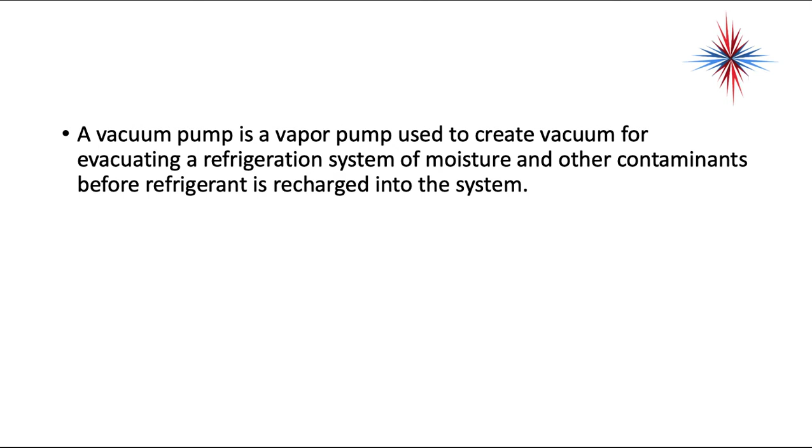This video is just a brief introduction and a little bit of a discussion about air conditioning vacuum pumps, or refrigeration vacuum pumps, because they're used on both air conditioning and refrigeration systems. So a vacuum pump is a vapor pump, not a liquid pump, and it's used to create a vacuum for evacuating a refrigeration system of moisture and other contaminants before refrigerant is recharged into the system.

A high vacuum pump will produce a vacuum higher than 28.92 inches of mercury vacuum. Most manufacturers are now recommending a vacuum of 500 microns prior to charging a system. The lower the micron count, the greater the vacuum. This can take several hours depending on system size. Creating such a low pressure condition is necessary to completely dehydrate the system. Do not rush vacuums, okay? Again, the lower the vacuum number in microns, the better off your vacuum is going to be.

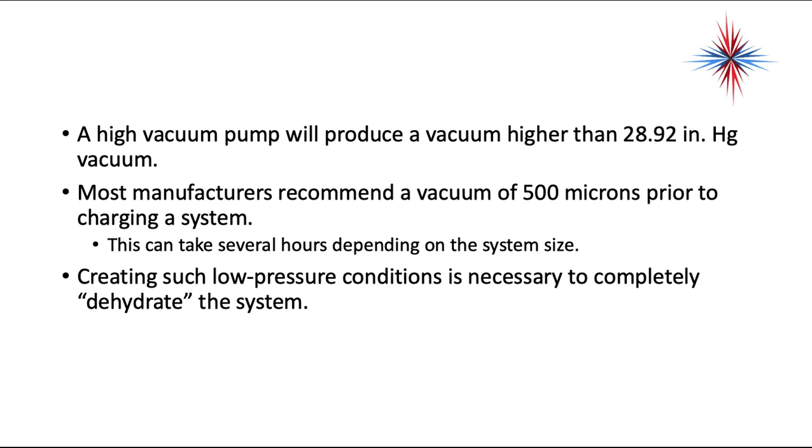It is necessary to remove all substances from the system because any foreign material can cause higher pressures than usual and possibly damage the system. HVAC technicians need to be very familiar with the vacuum pump specifications in order to choose the proper vacuum pump for a given job.

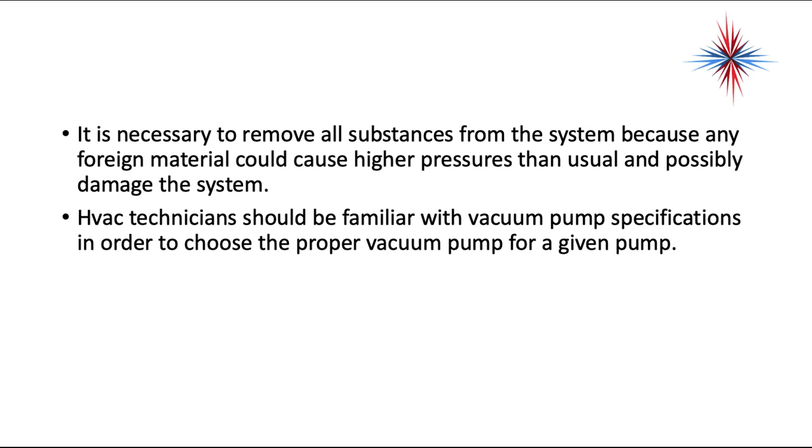Ultimate vacuum is a rating of the highest vacuum that a vacuum pump can pull. It is the most important specification of a vacuum pump and is usually measured in microns. The lower the number of microns, the higher the vacuum a vacuum pump can pull. Ultimate vacuum may also be called blank off pressure.

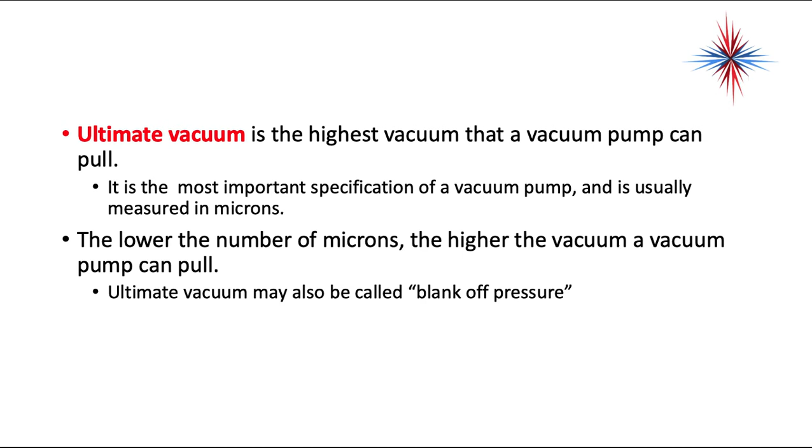Free air displacement is the speed at which gas can be pumped through a vacuum pump. It is measured in cubic feet per minute. The higher a vacuum pump's free air displacement number, the more gas is moved per minute. Free air displacement may also be referred to as volume capacity.

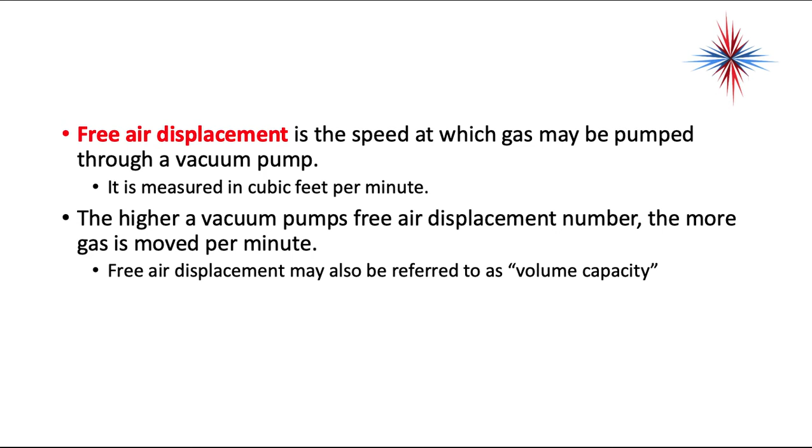Okay, so when we're talking about the free air displacement, it's in cubic feet per minute. A 1.5 CFM vacuum pump can handle a 3 to 5 ton residential system. 3 to 5 CFM can handle 5 to 100 ton medium systems, and 10 to 15 CFM can handle larger systems over 100 tons. Now here's the key. The more CFM, the more you're going to pay for the vacuum pump. It does not hurt to use a 3 to 5 CFM on a 3 to 5 ton residential system. You're going to pull a nice vacuum on it and you're not going to be there forever.

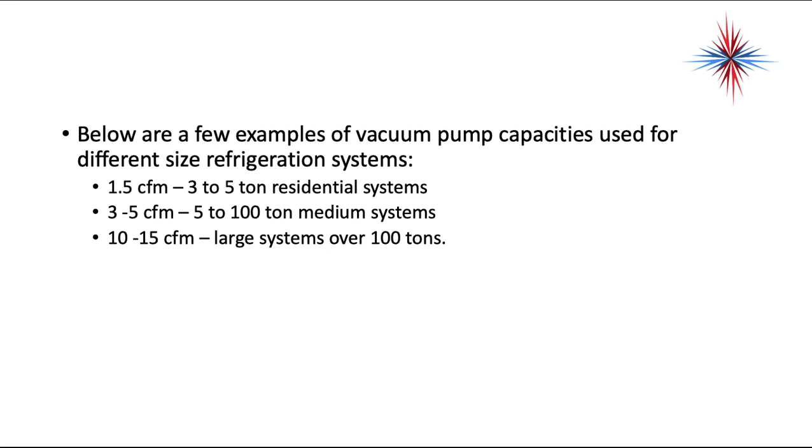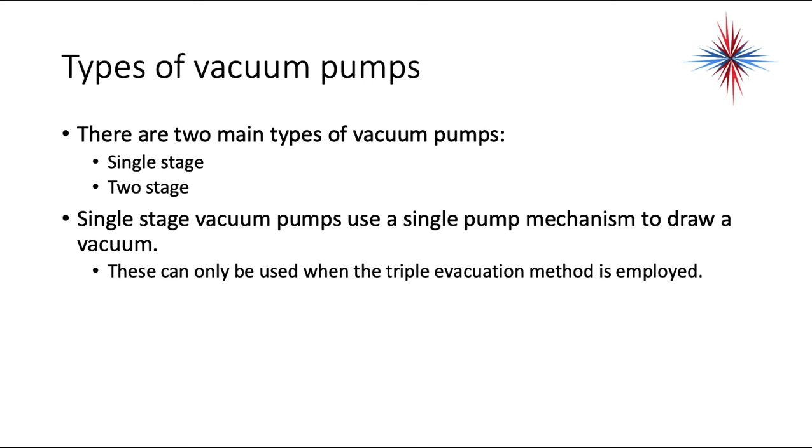There are two main types of vacuum pumps available. You have a single stage and a two stage. Single stage vacuum pumps use a single pump mechanism to draw a vacuum. They cannot be used to draw the deep vacuums required of 500 microns. They can only be used for like the triple evacuation method when you're only drawing 1500 microns. So again, single stage vacuum pumps, stay away from them.

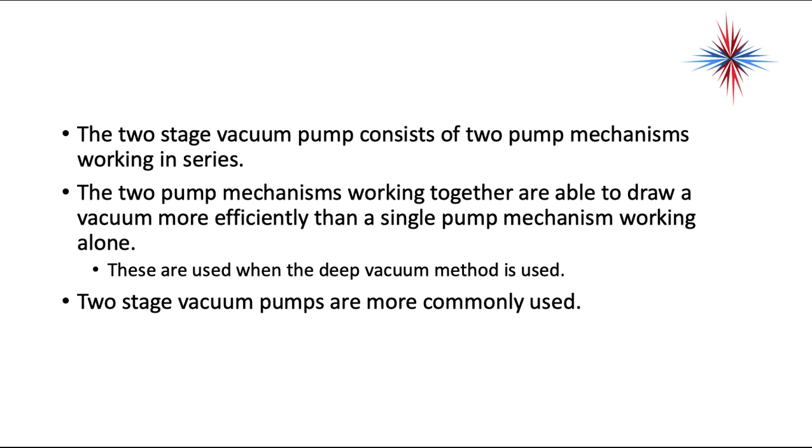Two stage vacuum pumps consist of two pump mechanisms working in series. Two pump mechanisms working together are able to draw a vacuum more efficiently than a single pump mechanism working alone. These are used when deep vacuum methods are used. Two-stage vacuum pumps are what you're going to find on most service trucks and in most supply houses now. This is a two-stage vacuum pump. We have a first stage that gets the first inlet from the system, that's the blue, and then we have a second stage, in red, that takes the output of the first stage and further draws a vacuum.

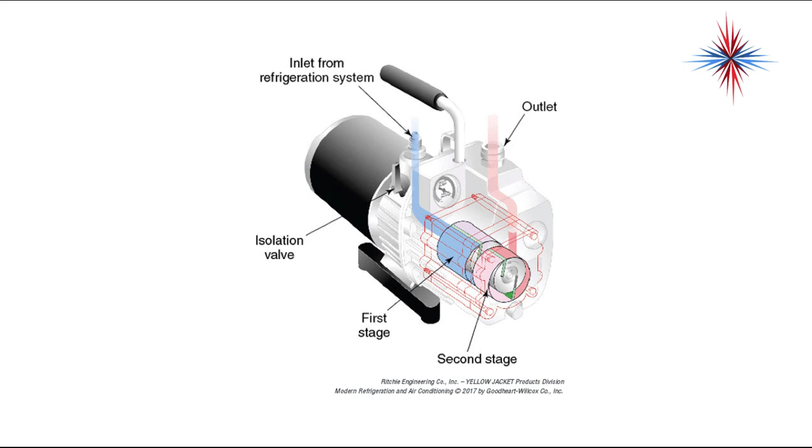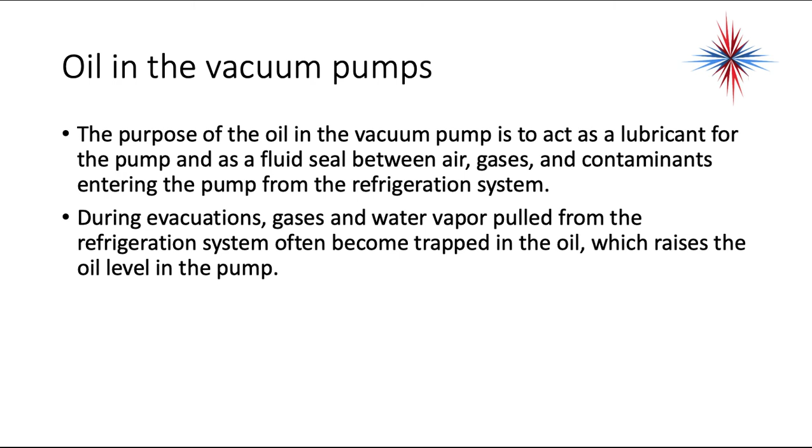The purpose of oil in the vacuum pump is to act as a lubricant for the pump and as a fluid seal between the air, gas, and contaminants entering the pump from the refrigeration systems. During evacuations, gases and water vapor pulled from the refrigeration system often become trapped in the oil, which raises the oil level of the pump. Most vacuum pumps have a sight glass that allows the technician to check the oil level and oil color. Vacuum pump oil should be replaced frequently since oil rapidly becomes dirty when water and solvent vapors are drawn and dissolved into it. Water will also turn the oil white and foamy.

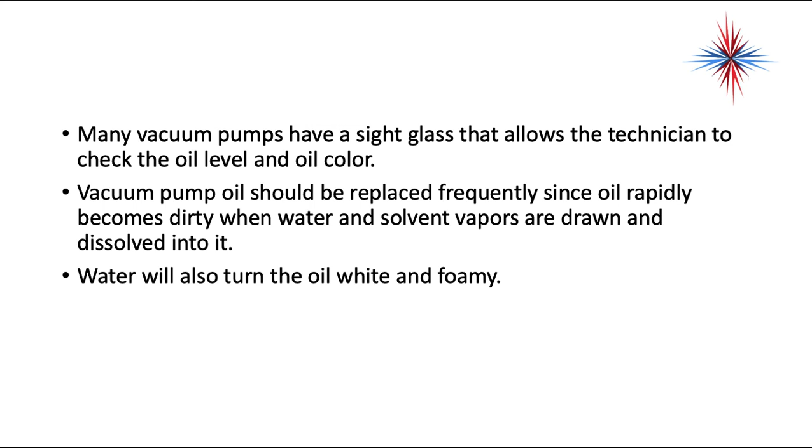Don't use a vacuum pump for a year without replacing the oil. Change that oil frequently. Sometimes if you've done a large job, change it after each job. Vacuum pump oil is not that expensive, and the savings you will get in time and effort from changing the oil is great. If dirty oil is left in the pump, sludge will form and the pump life will be reduced. When vacuum pump oil is clear, it means it's clean. For good evacuation results, change the vacuum pump oil before each system evacuation or test the vacuum pump.

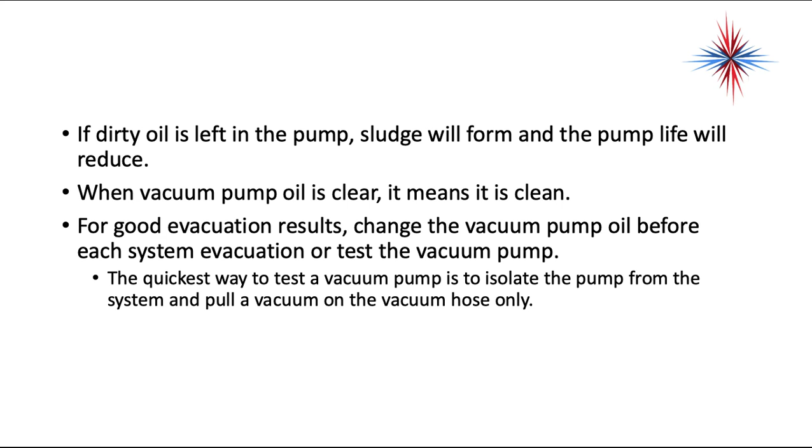The quickest way to test a vacuum pump is to isolate the pump from the system and pull a vacuum on the vacuum hose only. Use a T-fitting and connect an electronic vacuum gauge between the vacuum pump and the center port of the gauge manifold. Close the low and high side gauge manifold valves. Start the vacuum pump. Allow the vacuum pump to run long enough to pull a vacuum of about 500 microns.

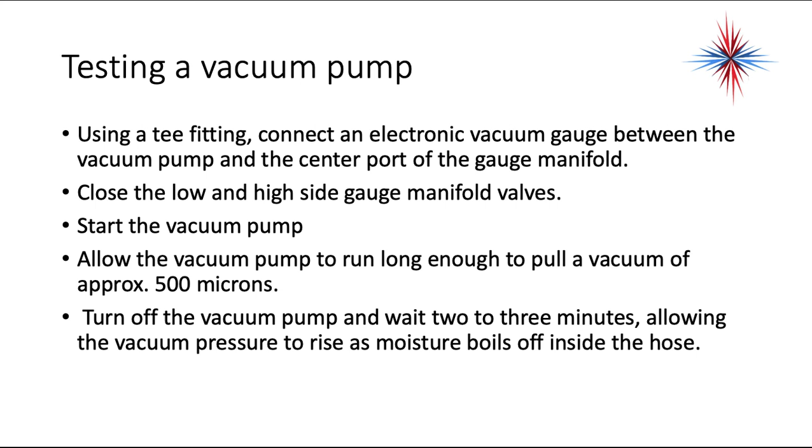Turn off the vacuum pump and wait 2 or 3 minutes, allowing the vacuum pressure to rise as moisture boils off inside the hose. Pull another vacuum down to 500 microns. Watch the vacuum gauge reading. If it rises, check for leaks at the hose fittings. If the pump will not pull down to a high vacuum, change the oil. Always follow the manufacturer's recommendation.

Key thing, if you have a system that is leak-free, if you have gauges that are leak-free, if you cannot pull a 500 micron vacuum with a vacuum pump, change the oil. If changing the oil doesn't work, recheck everything for leaks. But if you cannot pull 500 microns just on your gauges, you have a bad vacuum pump.